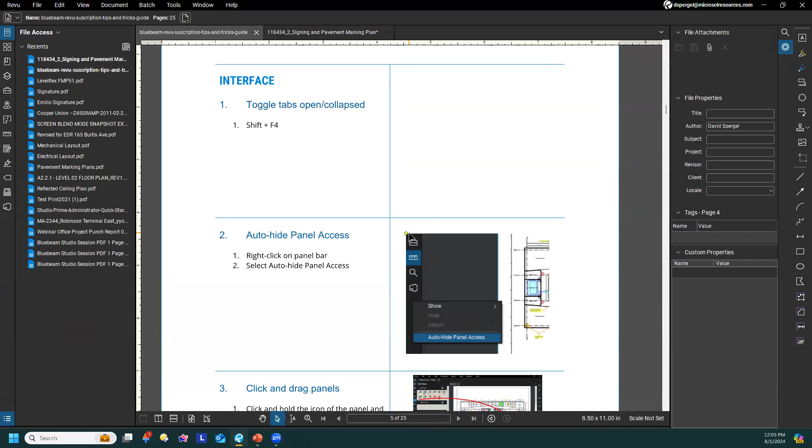The first thing I want to show you is how to toggle all your panels and tabs open, using the Shift F4 shortcut. Shift F4 will toggle all my panels closed, and if I push it again, it'll toggle them all open. This is a great way to quickly clear your screen of any panel clutter. Also, if you lose any of your panels, you can just bring it back with Shift F4.

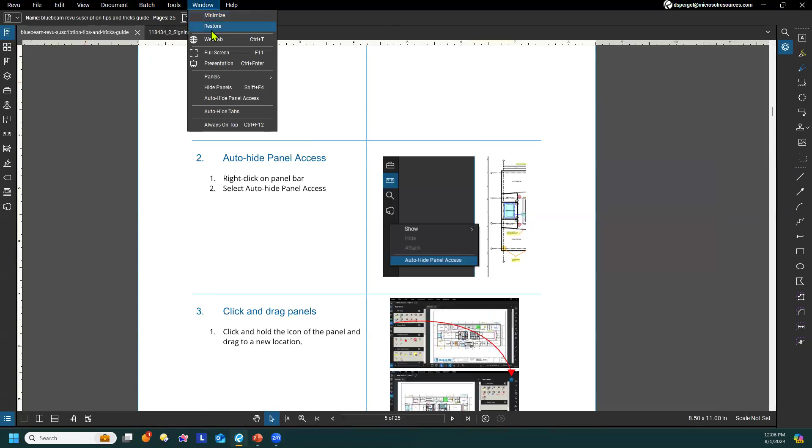Next we're going to talk about auto hide panel access. Panels are these little guys on the sides of your screen. If you click them, they will open up like so. You can also access them by going to Window, Panels, and you have access to all of your panels over here. If you right-click in any part of the sidebar, you can toggle on Auto Hide Panel Access, which will automatically hide the panels when they're not in use. To get them back, you just go over and click, and that'll bring it back.

Personally, I'm not a big fan of auto hide panel access. I usually keep it off. I like to be generally in control of when my panels are being hidden and when they're not. But if you want that as an option, it's available if you right-click and toggle it over there.

You can also click and drag your panels to move them to different parts of the screen. For example, right now I have my properties panel over here on the right hand side and my search panel. But if I wanted to bring my search panel back over to the left, you click and drag. You got to kind of fight Windows sometimes, because Windows wants to take it over, and now it's over there in its own window. Man, Windows, you're killing me.

If you're having this issue, what you can do is right-click on the icon itself, go to Attach, and select which section to attach it to. So if I wanted to attach it to the left, right-click, go to Attach, and select the portion of the screen you want to attach it to. If you have to fight Windows when it wants to make the thing half window, just right-click and do it that way too. To show you on the other side, click and drag. See, now it's not going to fight me. So clicking and dragging is nice, but if you can't do it because Windows is fighting you, right-click and attach to whatever portion of the screen you want.

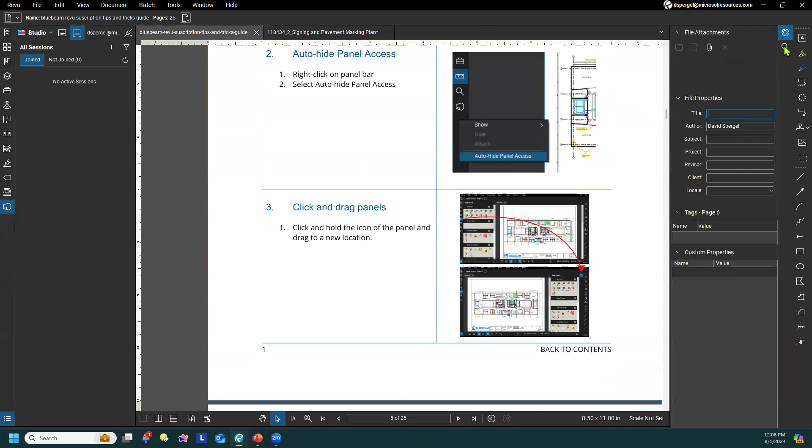A little tip: personally I like to make sure I have my properties on one side, and maybe my tool chest on the other side. What that lets you do is when you're selecting a tool from your tool chest, you have the properties panel immediately open on the other side. That's just one of the ways I like to do it. But of course, the beauty of being able to customize your interface is that you can do it however you want. So let me hit Shift F4 to close all of my panels.

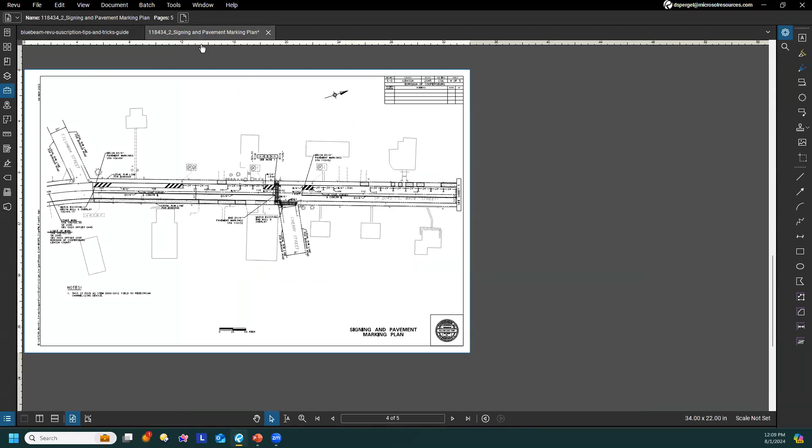Next thing is clicking and dragging your files. If you have multiple files open up here at the top of the screen, they will open in multiple tabs, and you can click through them by clicking the tabs. But if you wanted to make a new window, you can click and drag. It'll make this little ghosty appearance, but if you just let go, it will be its own window that you can drag over to another monitor or wherever you want. To put it back, just click and drag, bring it back to your tab bar, and it will snap back into the tabs.

Okay. How to open a second instance of Revu, real quick, very easy. Shift click the Revu icon in your Windows taskbar to launch a second instance in case you wanted to open up another file in Revu to do something else. Or if you're doing a webinar and you want to have your PDF notes on another screen and not have it mess up your presentation screen, you can shift click.

It will open up another instance of Revu. Right now it's doing it on my other monitor. You can't see it, but I promise, see right there, another instance of Revu. While we're on the topic of organizing your interface, I just wanted to show you guys a little tip. I can't really demonstrate this because it requires having two monitors.

But if you enjoy working with the markups list, one of my favorite ways to work with it, obviously markups list is extremely powerful, very useful, but sometimes it can crowd your screen. If you have all of your panels open, then you only get this little tiny window of screen to work with. What I like to do is right click, just like before. Instead of going to any of these other sections, left, right, bottom, if you click detach, it will make it a little floating window.

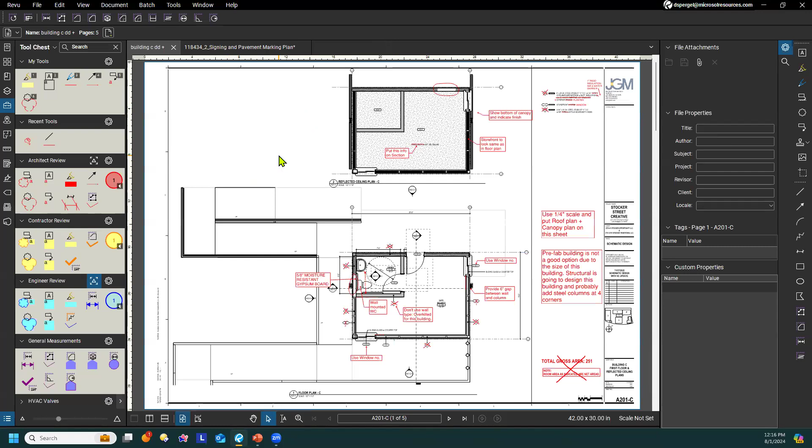Okay, opening other files in a Windows folder. So with a file open, you can hit Alt Page Up or Down to open other files in that same folder. This is useful if you have a set of drawings in an organized folder. Right now, this is just open in my downloads folder. So if I hit Alt Page Down, it's going to open up one of the other documents in my downloads folder. So not super useful for me, but probably useful for you guys that have more organized file structures. Let me get back to where I was here.

All right, opening files in the background: go to the File Access panel, hold Control and click the file you want to open but not see. So let's open up this one. This will just open it in another tab over here. So if you wanted to open it, you can just hold Control, click, and it'll open up in the new tab over there.

All right, if you wanted to open a specific PDF on startup, you can set that in the preferences by going to Revu, Preferences, go to the General tab, Options tab, and then you can choose a PDF you want to open on startup over here.

Okay, so enough with the file stuff, now to the fun stuff. And we're going to talk about, whoops, sorry about that. I was trying to close the panel. There we go. Actually, I could have just done Shift F4. Learned my own lesson. All right, so multi-selecting markups.

If you are familiar with AutoCAD or Rhino or other CAD software, this might be familiar to you. You can drag right to left and it will select any markup that you touch. See? Again, dragging right to left, if it just touches the markup, it will select it. Dragging left to right will only select markups that are fully enclosed by the box. So, like so.

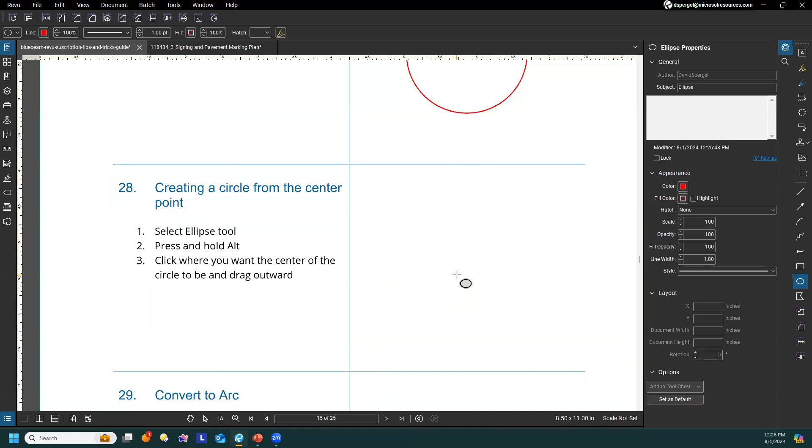All right, to create a circle from the center point, select the ellipse tool, hold down Alt, and click where you want the center to be, then drag outwards. Normally when you do the ellipse, it's from the corner, like so. But if you push Alt before you start creating it, it will do it from the center point.

Okay, you can convert line segments of a polyline to arcs. This is useful for drawing curved shapes or taking measurements of curved areas. To do this, we're going to right-click and select Convert. No, hold on. Select the segment, right-click, and convert to arc.

Am I missing it? Double check layer or no, oh, okay. Sorry, it's selecting the snapshot. Sorry. Okay, I'm not crazy. It just wasn't selecting. Okay, all right.

All right. So what I'm gonna do is I'm gonna send this to the back so I can select my polyline. And then if I right-click the polyline, it'll let me convert to arc. Okay, I'm not crazy. Well, not about this at least. Maybe a little bit. So now I can right-click on this one, convert to arc, and then I can do my best to match the... There we go. Okay, it's a little off because I moved the snapshot around, but hopefully you get the idea there.

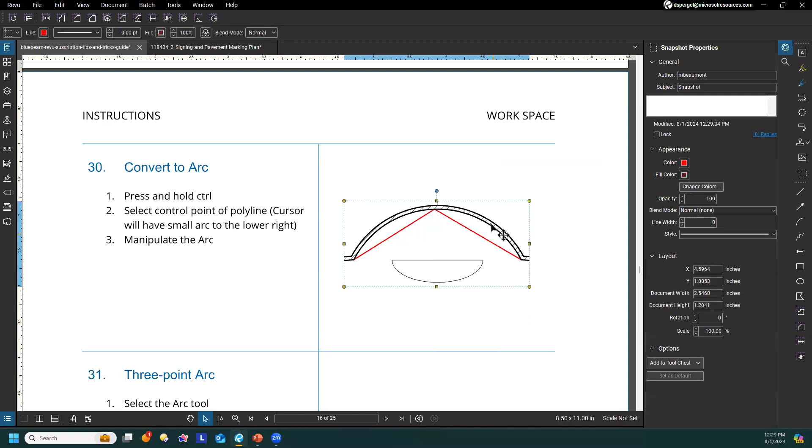If you press and hold Control and then select the control point of the polyline, you know what? I think the same thing is going to happen. So let me right-click, put this to... Actually, let me just lock it so that it doesn't get in the way. Okay, so now I can select. Come on. All right, maybe I still have to put it in the back. All right, unlock. Send to back. Press and hold Control, and if I select, there we go.

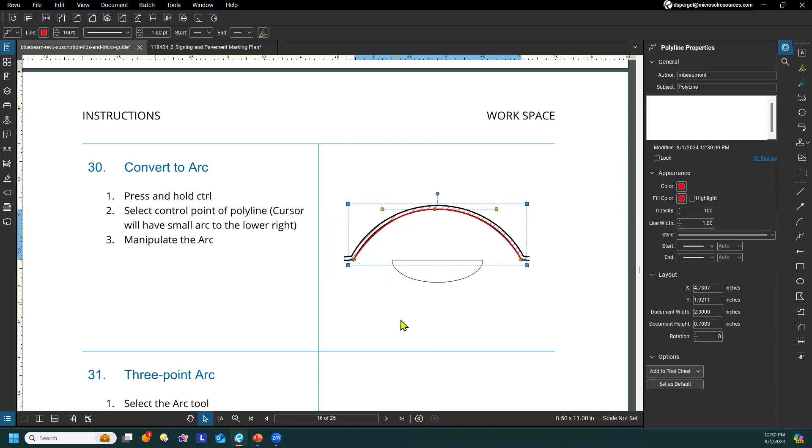Notice how when I hold Control and put my mouse cursor over the control point, it turns into like the little arc symbol. Holding Control and click will convert that to an arc as well, just like I did before. Let's see if I can get that. There we go. There we go. Now we're cooking. Okay.

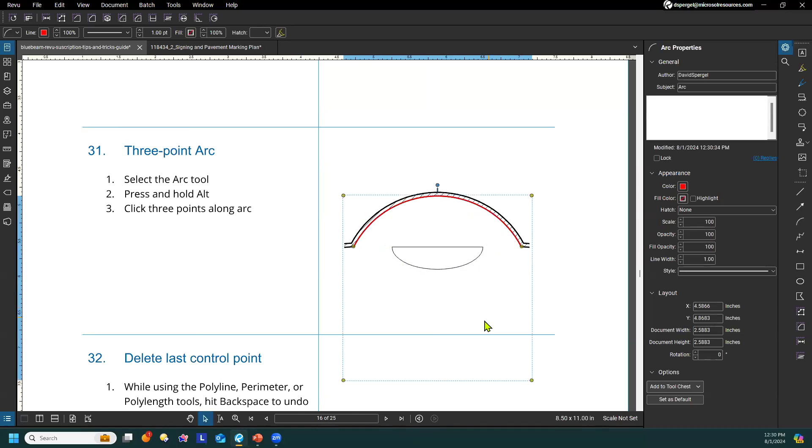All right, to create a 3-point arc, select the arc tool from here, or go to Tools, Markup, Arc. Press and hold the Alt key, click 3 points along the arc, 1, 2, 3, and there you have a three-point arc. Just another way to make curved shapes. So you can do it with the polyline and then convert it, or you can do it directly with the arc tool.

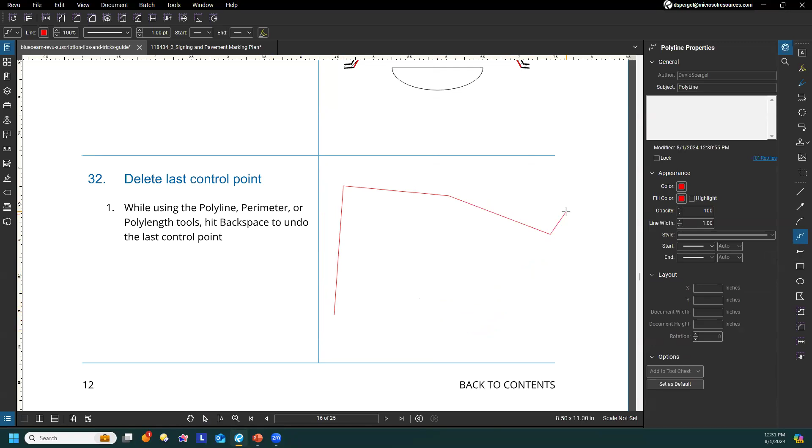To delete the last control point, just hit the backspace button to undo. So let's say you're taking the area measurement, you miss one, you say, oops, I want to go back, you just push backspace and you'll go back to the previous control point. So no need to hit escape and do it all from the beginning. You can just hit the backspace button to undo.

Okay, so to add or subtract a control point, hold Shift and hover over a polyline, perimeter, polylength, or area markup. You'll notice that the cursor will display a small plus when you do so. Click to add a control point at that location. Now you can manipulate it like it was there the whole time. Now, if you mouse over an existing control point while holding Shift and click, you will delete it. So same shortcut, just dependent on where you're clicking.

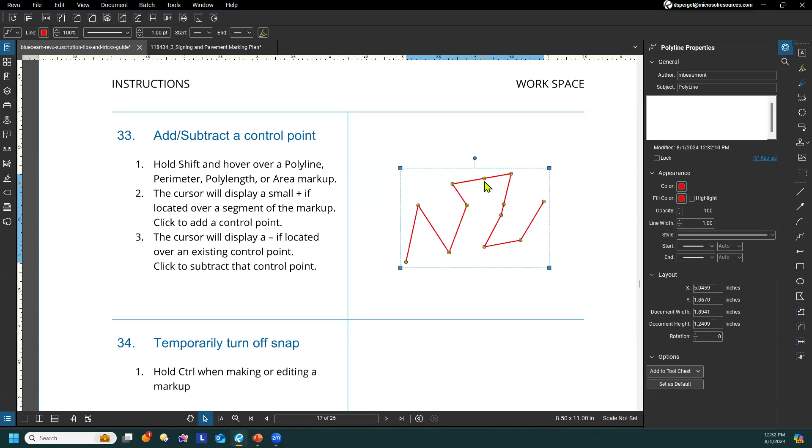All right, so to temporarily turn off snap, you can hold Control while making or editing a markup. So, for example, say it's trying to snap to these control points, pushing Control will turn that off so you can place it freely.

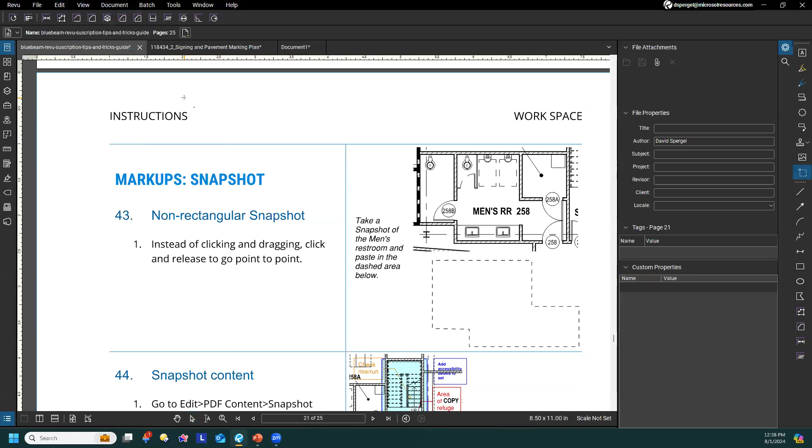All right, this is a very useful one that you might not know. You might be familiar with the snapshot tool, which is in Edit, Snapshot. And you might be used to just drawing a box around whatever you want to copy. But did you know that you can also just click on the points that you want to snapshot, and you can make a non-rectangular snapshot.

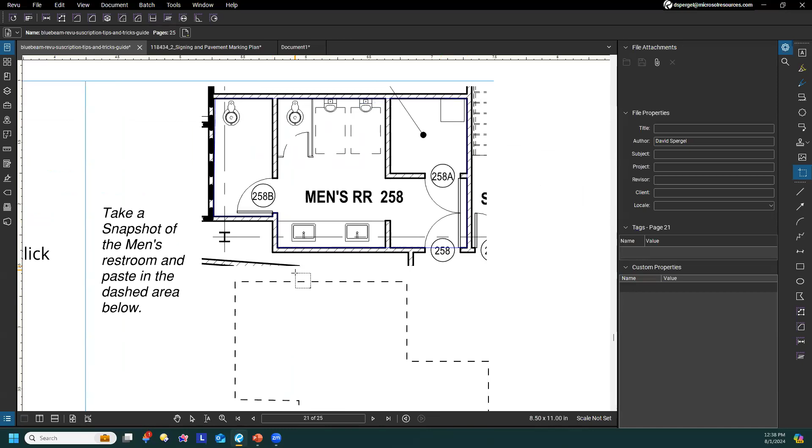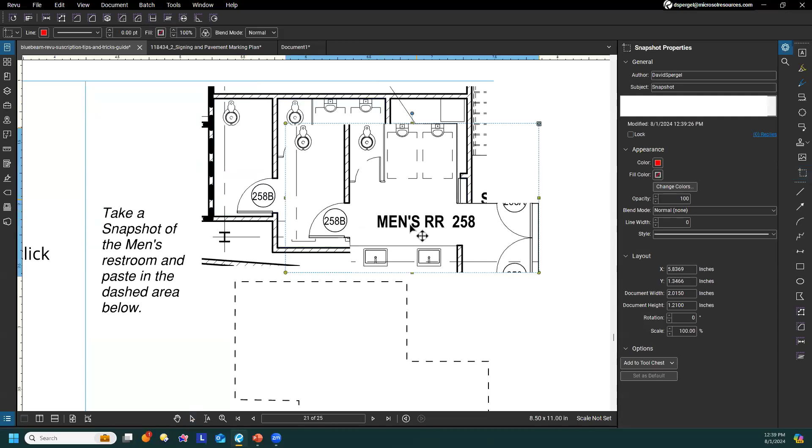Here we go. There, now I got a nice, oh, actually, I messed up. Sorry. Let me do that again. That's my fault. That's a user error. I accidentally got the closet of the men's bathroom. I just want the bathroom. All right, not perfect, but there we go. So now I can fit this into my little, there we go. Neat.

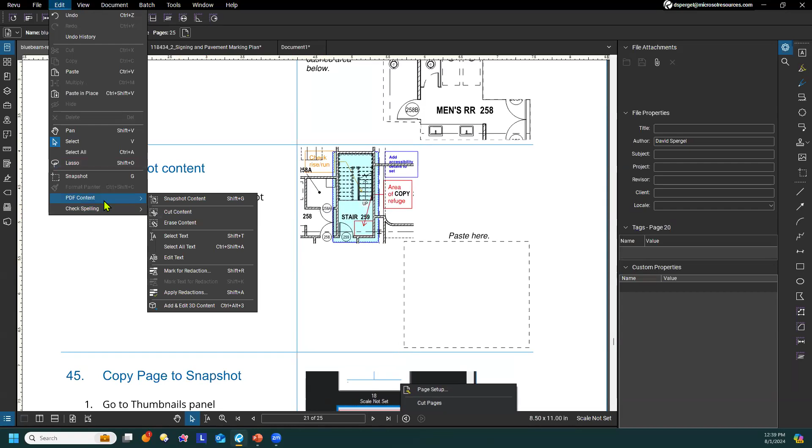Okay, so if you have a document that's already marked up, but you just want to snapshot the content of the document without getting the markups, you can go to Edit, PDF Content, Snapshot Content, and make a box here. Okay, well that didn't work. All right, I'll be honest, I did not test that one, but let me show you over here.

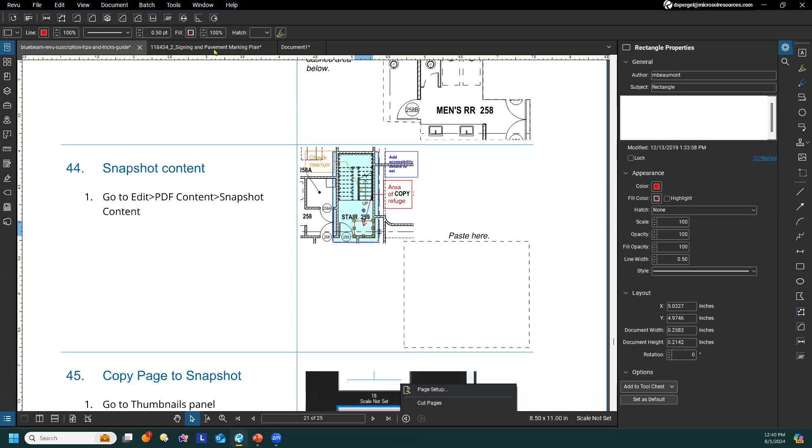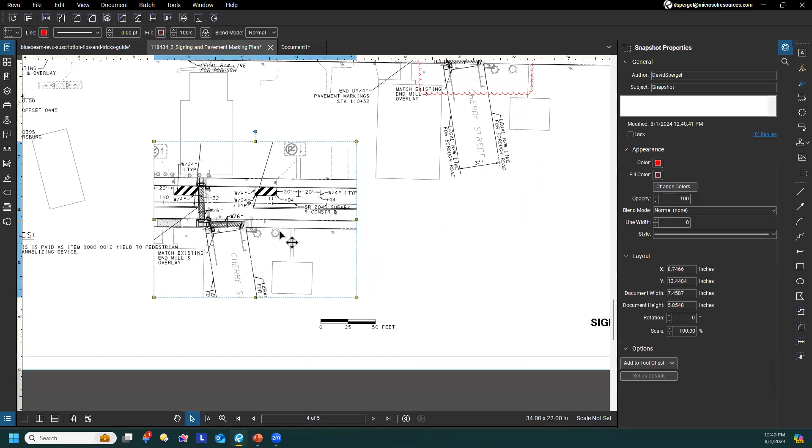So if we make a markup, I just want to prove that I'm not crazy. Markup, okay, and then we go to Edit, PDF Content, Snapshot Content, select that. There. It will snapshot the content, not the markup. Okay, not crazy.

You could also copy an entire page to your snapshot. If you go to your thumbnails panel, right click on the page you want to snapshot and click Copy Page to Snapshot. And then you can paste the entire page.

Okay. And you can also change the colors of a snapshot. So if you right click on the snapshot, go to Change Colors. You can select the source color and then the color you want to change it to. So let's say black and change to red. You can also add a tolerance to it. So if you had any grayscale, it would capture those as well.

And you can also do the same thing by selecting the markup, going to your properties panel, and then selecting Change Colors. It will open up the same window.

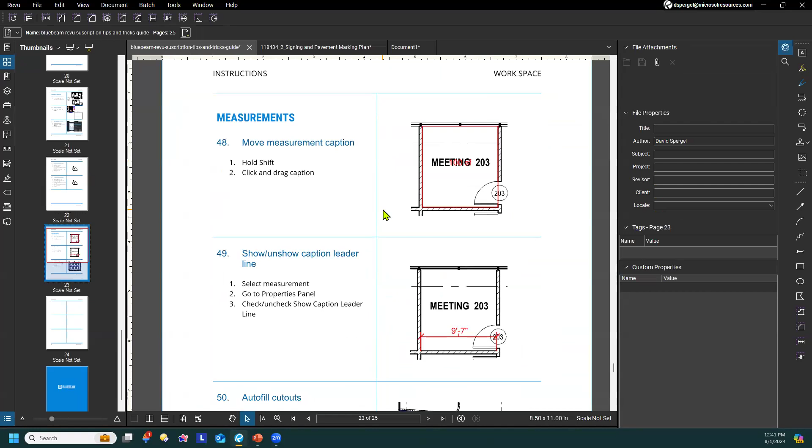Okay, and then a few on measurements. So if you make a measurement, and let's say this area measurement is overlapping with the Meeting 203 room, you can just hold Shift, click and drag the caption to move that into a space where that is visible.

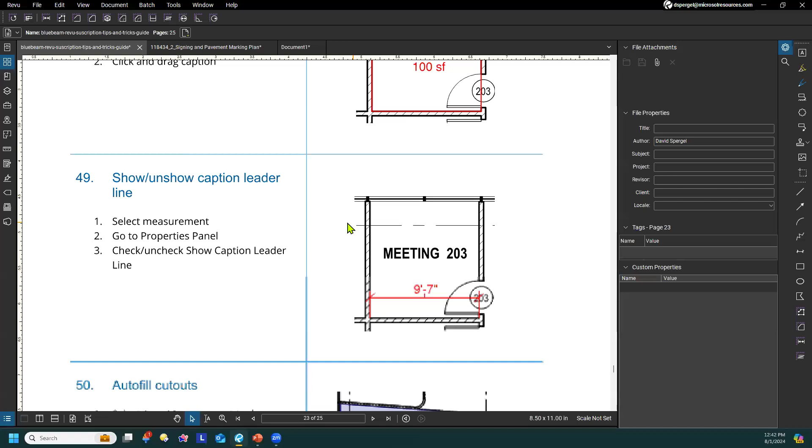So you can also choose to show or unshow the caption leader line. If you select the measurement, go to the properties panel, and then check or uncheck Show Caption Leader Line. That would be this guy right there. So if I Shift move, that'll move with it. But if you didn't want to show that, you can just unselect that there.

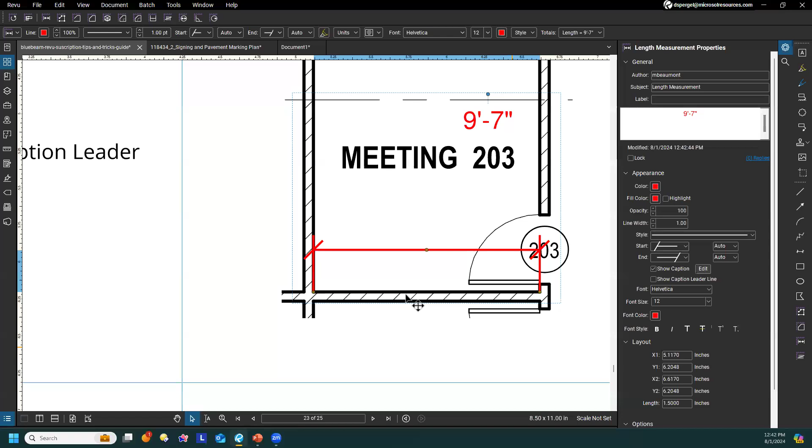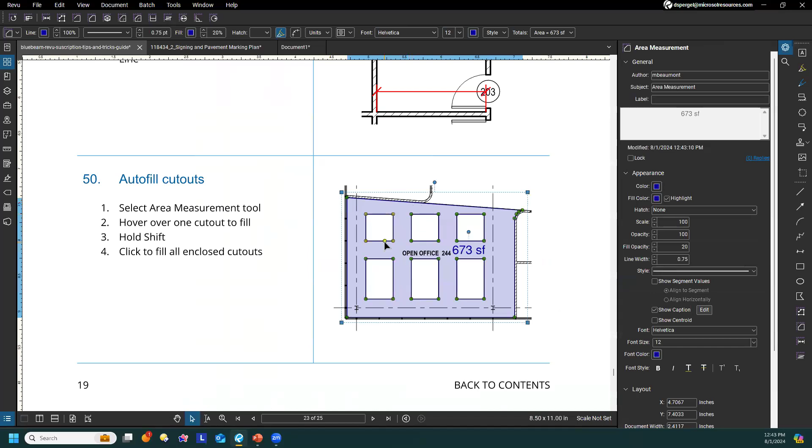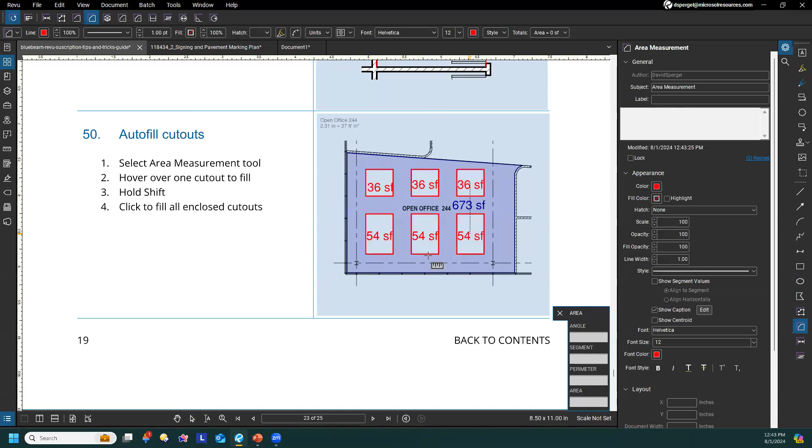And the last tip: if you have an area measurement with cutouts and you wanted to fill in those cutouts, you can select the area measurement tool, hover over, and now you can fill in with another area. So if you wanted to fill in an area within an area, you can do that by selecting the area measurement tool. And well, those are already filled in, so.

Okay, and that brings us to the Q&A portion of the experience.

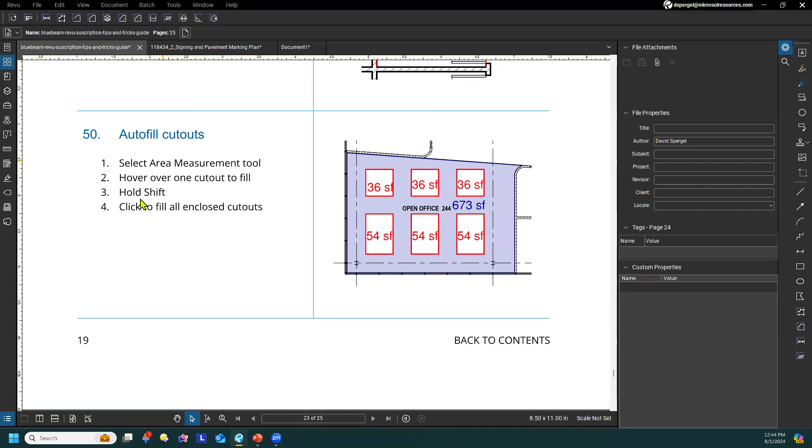Lynette is asking, will you be sending all of the tips to all attendees? Yes, I will put this document on our blog that you can access for your own reference. It'll also have all of these little workspace things that you can play around with the tools on your own as well.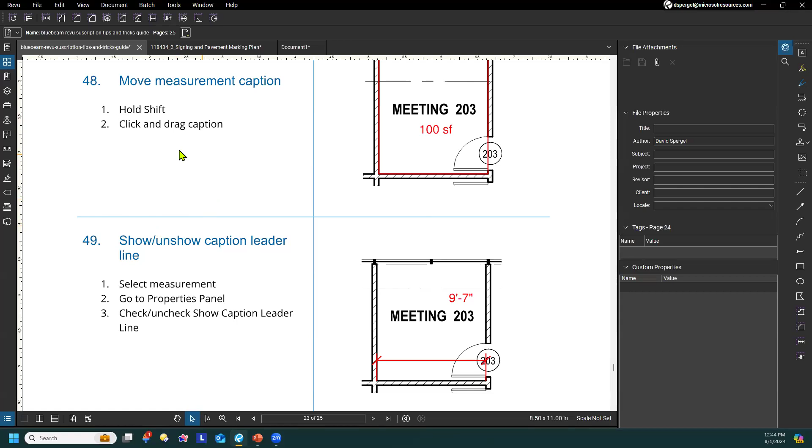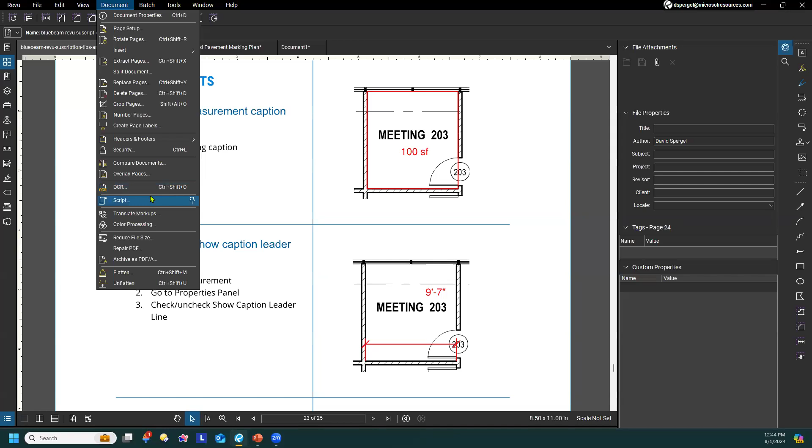Ted is asking, as a plan reviewer, I review multi-page documents or a plan set, and there are times search does not come back with any results. Does Bluebeam have anything like you can tell Adobe to recognize text, like OCR? Yes, absolutely. Bluebeam does have built-in OCR. You can access that by going to Document and selecting OCR, and it should be able to, of course, a lot of that is dependent on the quality of the document you're working with. But yeah, absolutely, you can click OCR and it should be able to pick that stuff up.

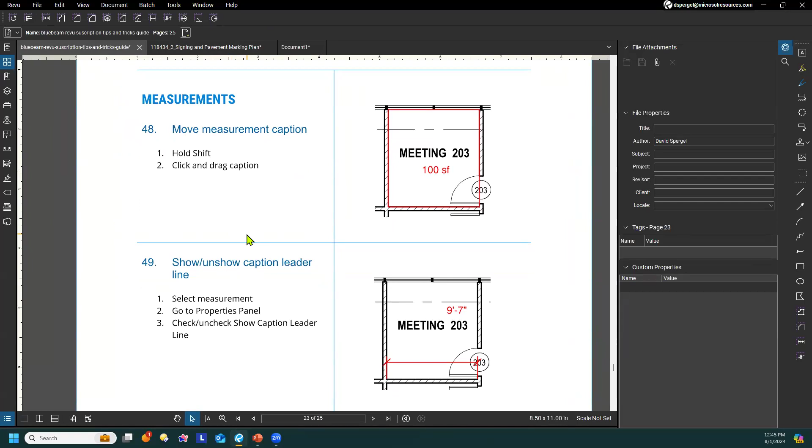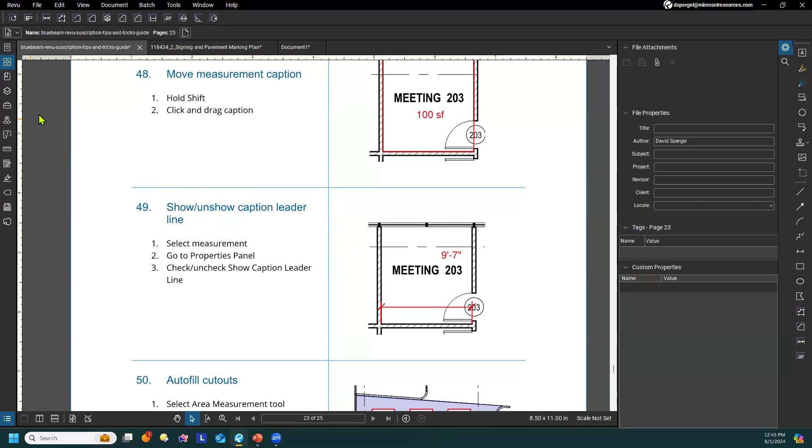Carlos is asking, can you select an elevation and measure and count windows in an elevation? Let's see, that might be a little bit tough, because Bluebeam just works with the PDF, so it doesn't know a particular elevation is different from another one. What you could do is search within a particular space on a document at an elevation, by creating a space. So if I wanted to do like elevation here, you can call this elevation one, and then you can just do a search within that space.

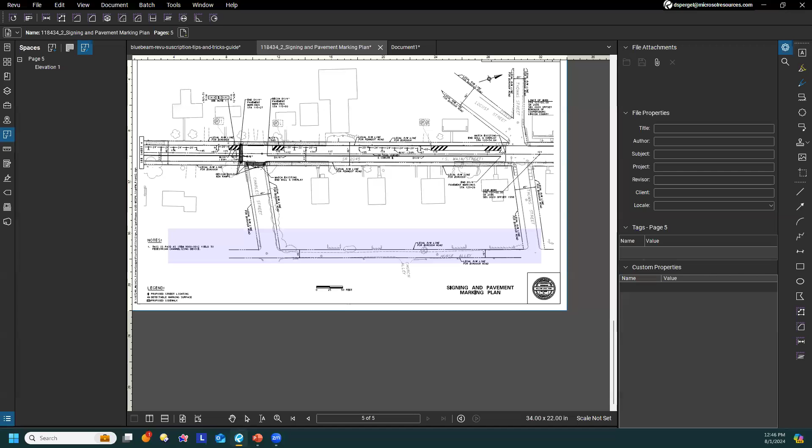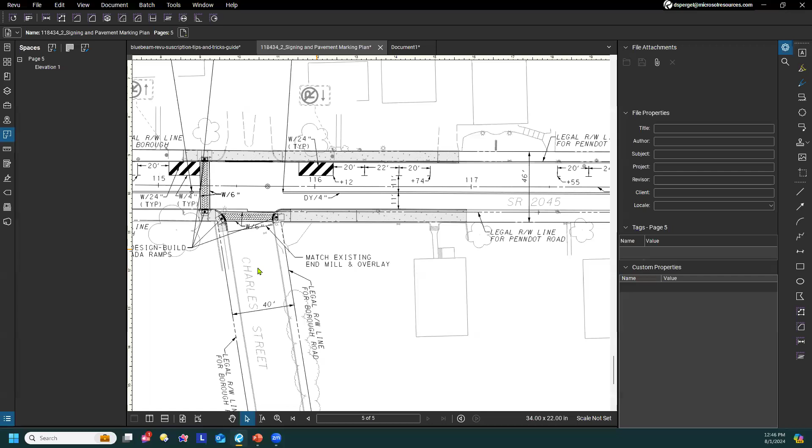Elizabeth is asking what OCR is. OCR stands for optical character recognition. What it does is, let's say you have a scanned document or a document that was in raster form, and you want to be able to search the text. What you can do is select Document, run the optical character recognition, and the Bluebeam software will go through the document and try to pick out the words and make it a searchable document for you to utilize.

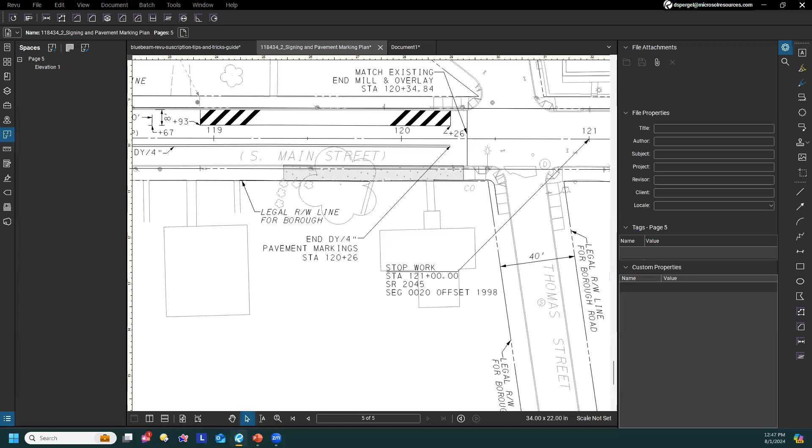Okay, any more questions? Light on the questions today. Yeah, it looks like that's it for questions. Oh, wait, oh yeah, yeah.

Yes, OCR, Ted, that's a good point I should mention. OCR is only available in Revu eXtreme or Complete if you're on the new subscription version. Thanks, Ted.